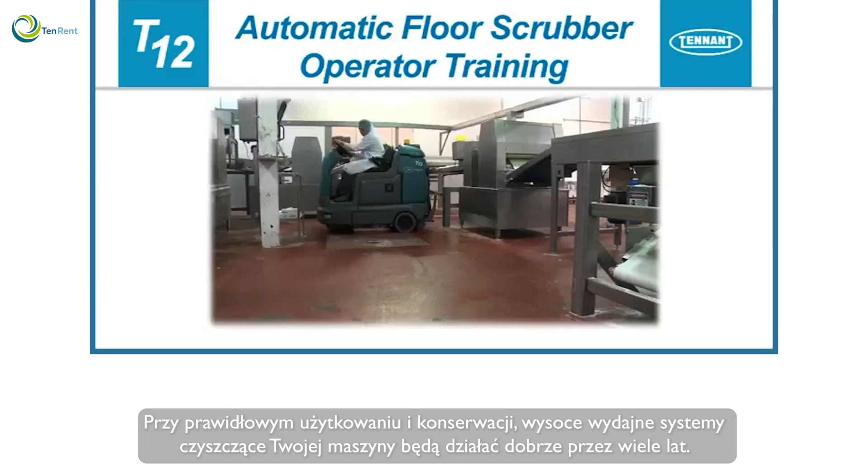Congratulations on the purchase of your new Tennant floor scrubber. With proper use and care, your machine's highly efficient cleaning systems will perform well for many years to come. This operator training video will help you better understand how to prepare your machine for use, scrub your floors, and care for your machine so you get the longest life and best performance from your floor scrubber.

Safety: it is the operator's responsibility to operate the machine safely. The safety labels that appear on the machine indicate important information you need to be aware of when operating the machine. The operator should read and fully understand the operator's manual prior to operating the machine.

How the scrubbing systems work. Your machine can effectively scrub dirty floors. The one-step scrub button makes it possible to immediately begin scrubbing with the activation of a single button. As the machine travels forward, the desired amount of cleaning solution is regulated and distributed to the floor. The brushes use the cleaning solution to scrub the floor clean. When traveling forward, the squeegee wipes the dirty solution from the floor, while the scrub vacuum fan draws the dirty solution collected by the squeegee off of the floor and into the recovery tank.

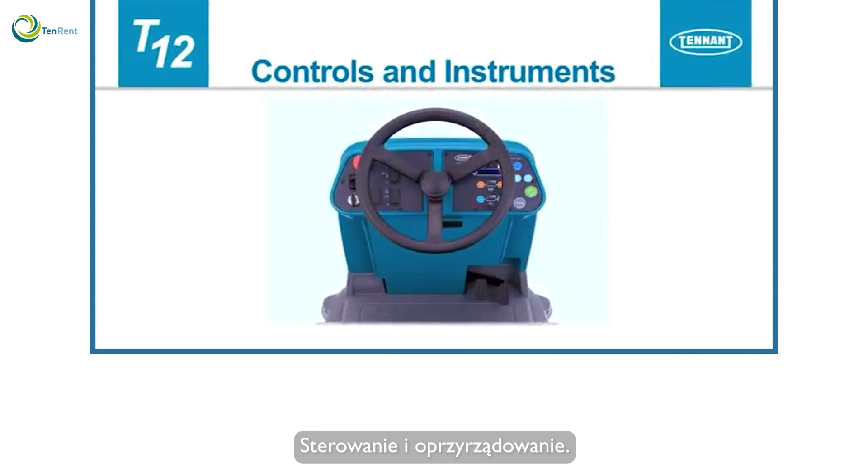T12 controls and instrumentation. The steering wheel controls the machine travel path. There is a control panel to the left of the steering wheel. An on-off key switch is used to control machine power. Turn the key to the right to turn the machine's power on, and to the left to turn it off.

The directional switch controls the forward or reverse direction of the machine. Place the switch in the forward position to propel forward, and the reverse position to propel in reverse.

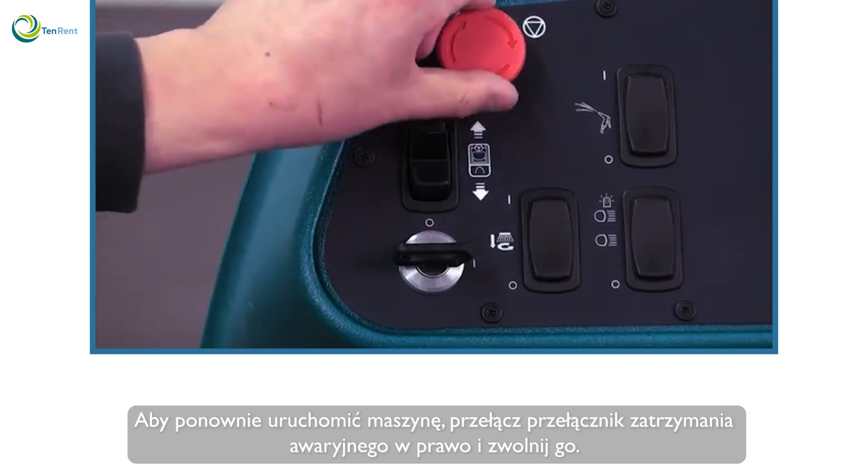The power kill switch stops all power to the machine. Press the switch to stop the machine power. To restart the machine, turn the power kill switch to the right and release it. Then cycle the key switch off and then on again. Note: the power kill switch should only be used in case of an emergency. It must not be used for normal stopping while the machine is moving, as this may damage the machine.

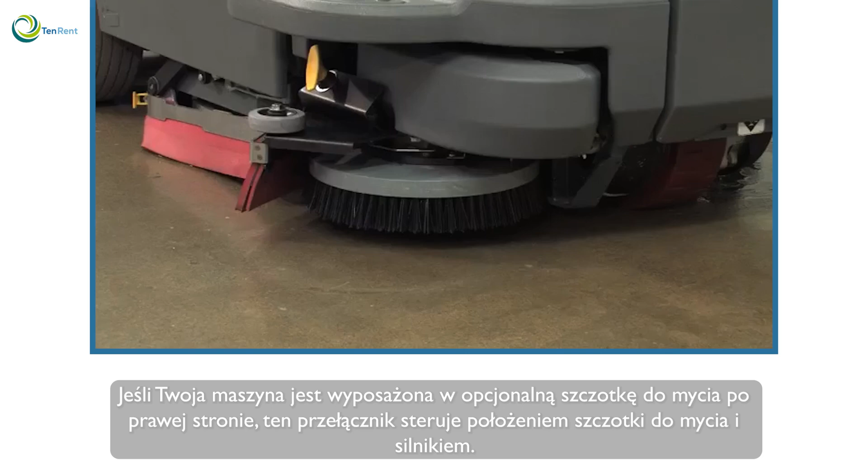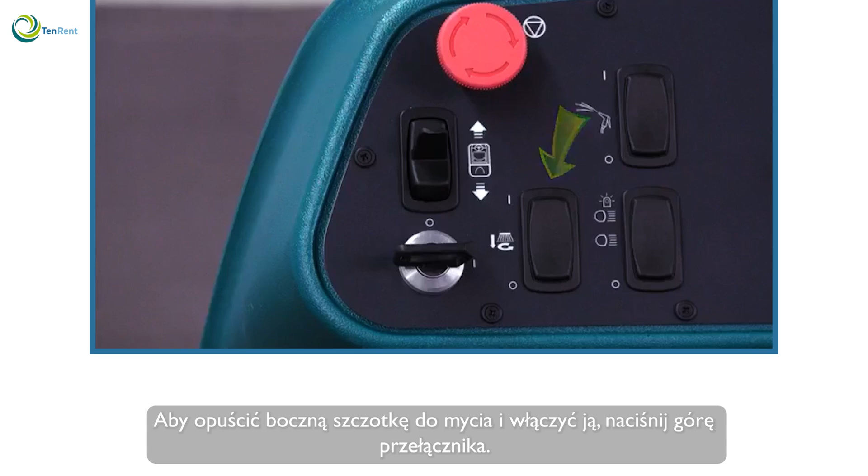If your machine is equipped with the optional right side scrub brush, this switch controls the position of the scrub brush and the motor. To lower the side scrub brush and turn it on, press the top of the switch. To raise the side scrub brush and turn it off, press the bottom of the switch.

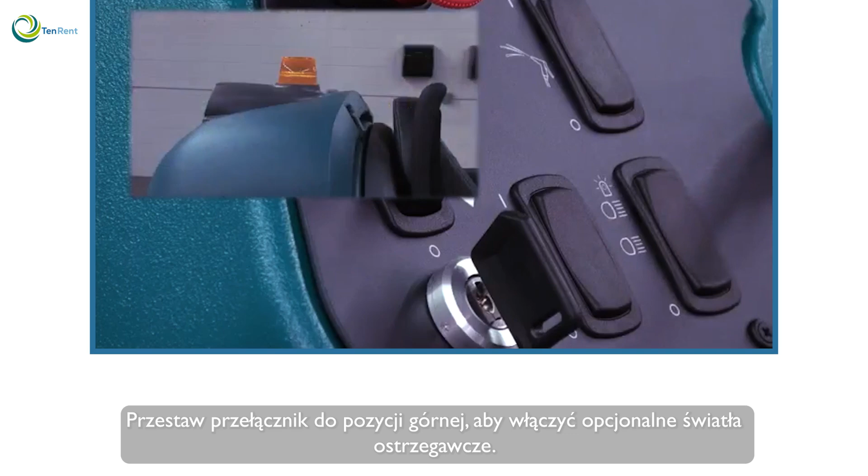The operating lights are controlled by the light switch. Place the switch in the middle position to turn on the operating lights. Press the top of the switch to turn on the operating lights and the optional safety lights. Press the bottom of the switch to turn off all lights.

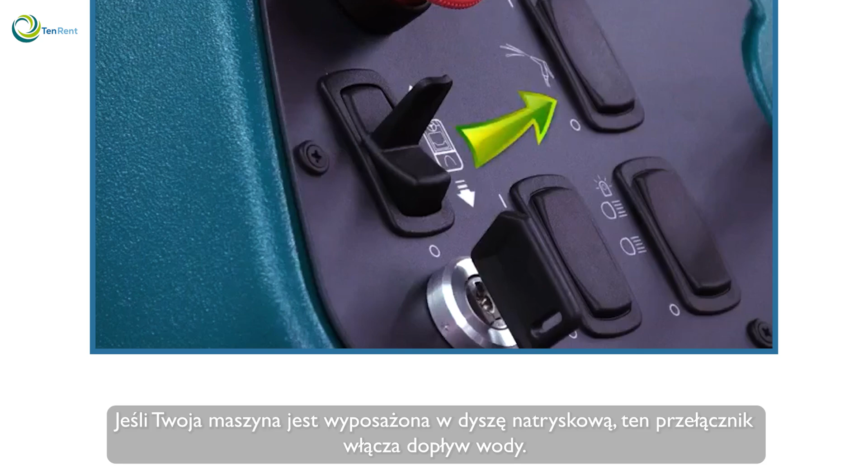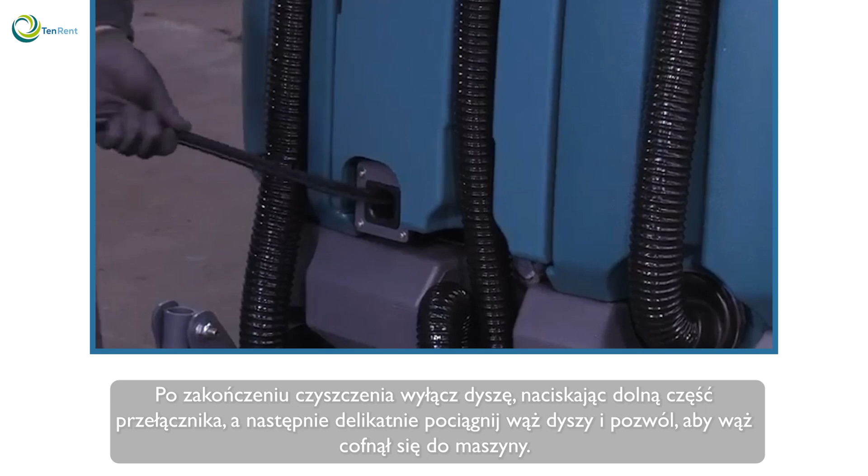If your machine is equipped with a spray nozzle, this switch turns on the water supply. To turn on the spray nozzle water supply, press the top of the switch. Next, pull the spray nozzle from the back of the machine and clean as required. When you are finished cleaning, turn off the spray nozzle by pressing the bottom of the switch, and then gently tug the spray nozzle hose and allow the hose to retract into the machine.

To the right of the steering wheel is a control panel. Most of the scrubbing functions are controlled by the operator using the controls on this panel. There is a display window near the top of this panel. Above the display window is a warning indicator. In certain conditions, the warning indicator will turn on and a message will be displayed in the window below the indicator. You may be required to stop the machine and follow your company's service procedure guidelines to correct the condition.

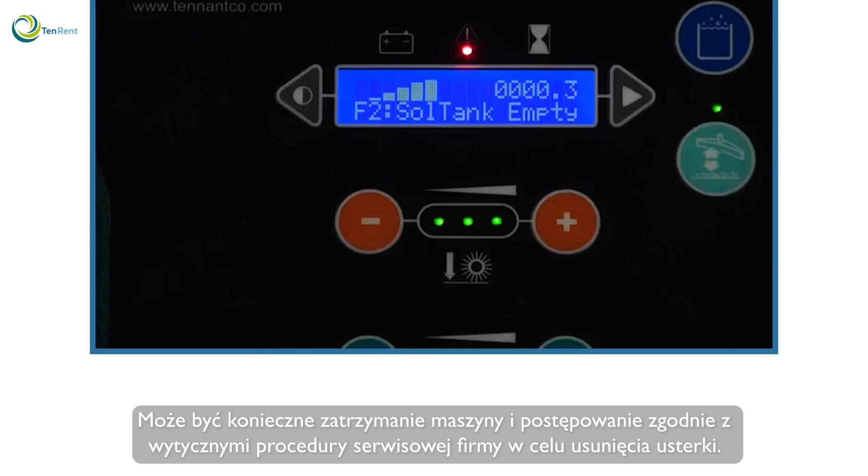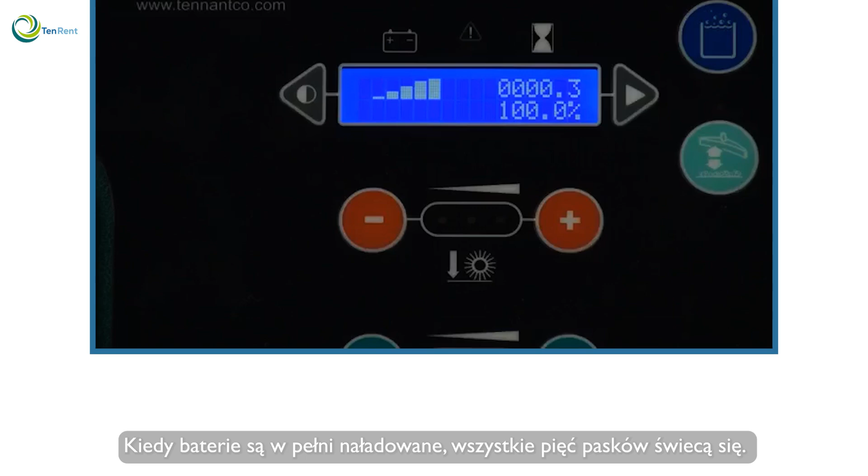This display window is also used to indicate the battery charge level, hour meter reading, the solution level, and the recovery tank level. The battery discharge indicator displays the charge level of the batteries while the machine is operating. When the batteries are fully charged, all 5 bars are lit. Recharge the batteries when there are no longer any bars showing in the display.

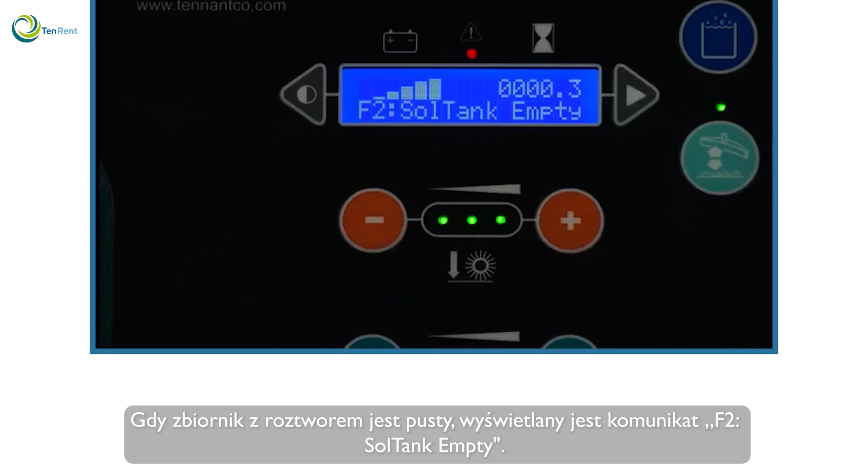The hour meter records the hours the machine has been operated. Use this information to determine machine service intervals. When the solution tank is empty, the message F2 Sol Tank Empty is displayed. Refill the solution tank when it is empty. When the recovery tank is full, the message F1 RCV Tank Full is displayed. Empty the recovery tank when it is full.

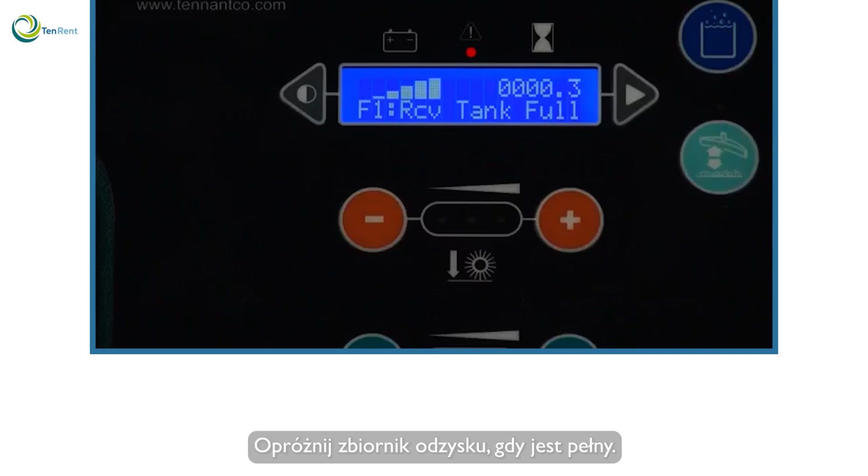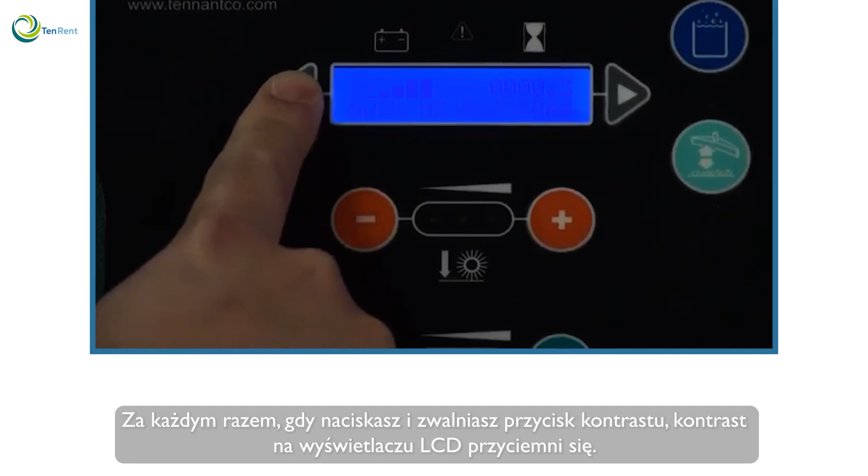The display contrast can be easily adjusted. Each time the contrast button is pressed and released, the contrast will darken in the LCD display. Once the display reaches the darkest setting, pressing and releasing the button again will increase the display to the brightest setting. The Supervisor Control button is used to access the configuration and diagnostic modes.

Only properly trained service personnel should access these modes.

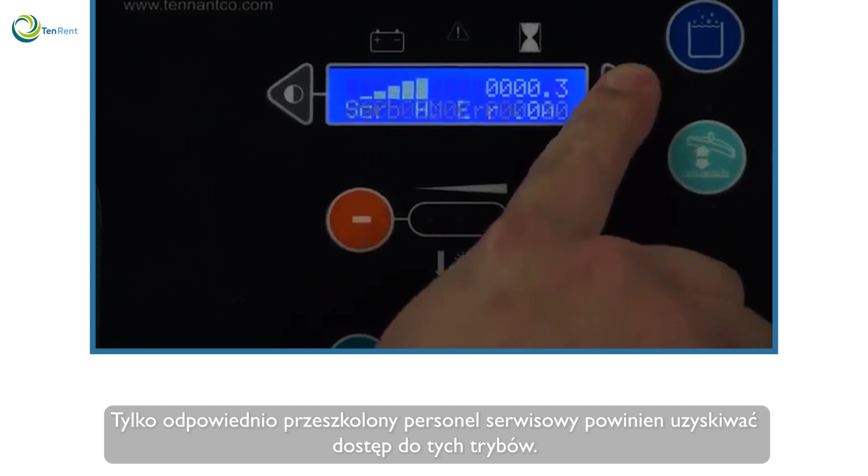The large green button is the one-step scrub button. Pressing this button turns on all scrubbing systems that were active the last time the machine was used. Note: there may be a short delay before all scrubbing systems are activated and the indicator light turns on. Pressing the button again turns off all scrubbing systems. When the one-step button is pressed to stop scrubbing, the machine remembers which scrub settings were active. When it's pressed again to start scrubbing, the machine returns to those settings.

To allow the cleaning solution to remain on the floor and improve your cleaning results, you can raise the rear squeegee and turn off the vacuum fan by pressing the squeegee and vacuum fan buttons. Pressing these buttons again will lower the squeegee to the working position and turn on the vacuum fan, so you can recover the solution.

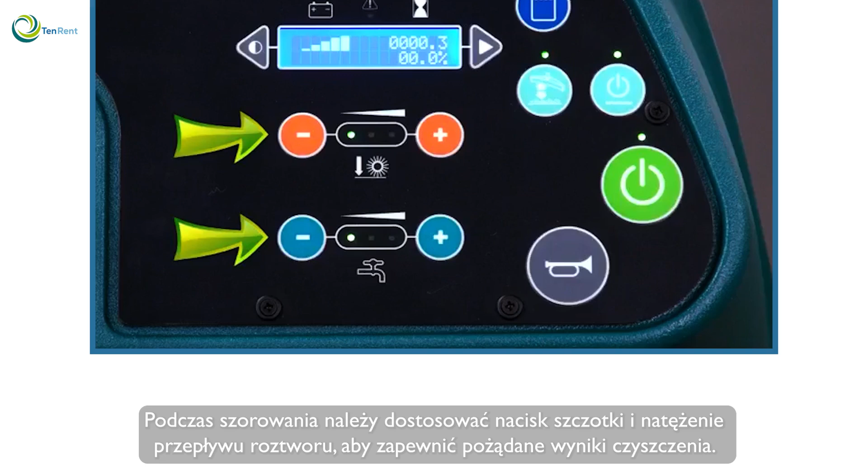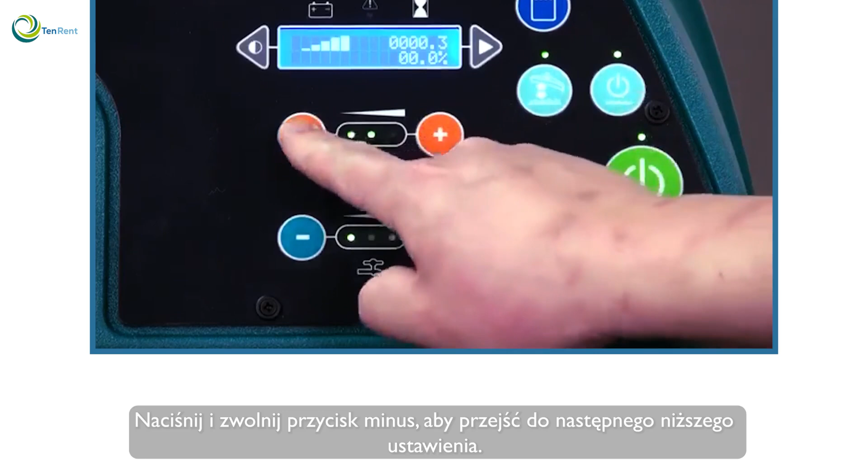While scrubbing, the brush pressure and the solution flow rate should be adjusted to provide the desired cleaning results. When the brush pressure LED on the left is lit, the brush pressure is at its lowest setting. To increase the brush pressure to the next higher setting, press and release the plus button. Press and release the minus button to move to the next lower setting.

The solution flow rate is adjusted with the solution decrease minus button and solution increase plus button. Under normal cleaning conditions, the brush pressure and solution flow rate should be set to the minimum settings required to clean the floor. Note: travel speed and floor conditions will also affect cleaning performance.

The Scrub Mode button controls the optional ec-H2O scrubbing solution system. With this button inactive, the machine operates in conventional mode. The ec-H2O technology will be explained in more detail later in this video.

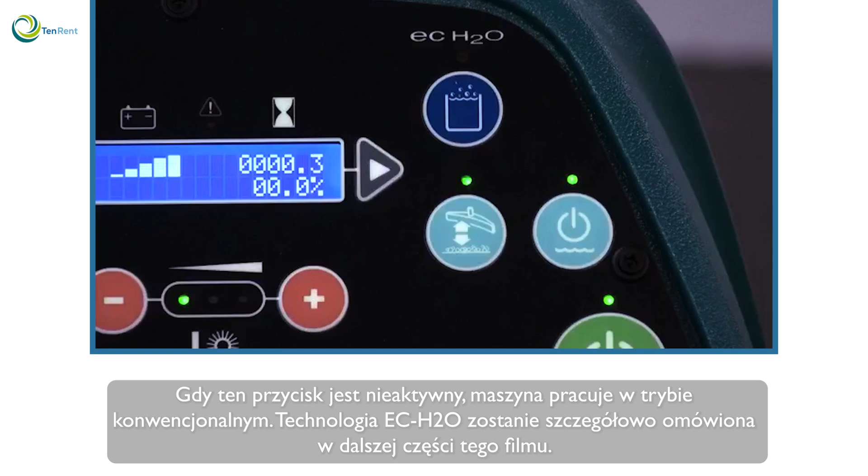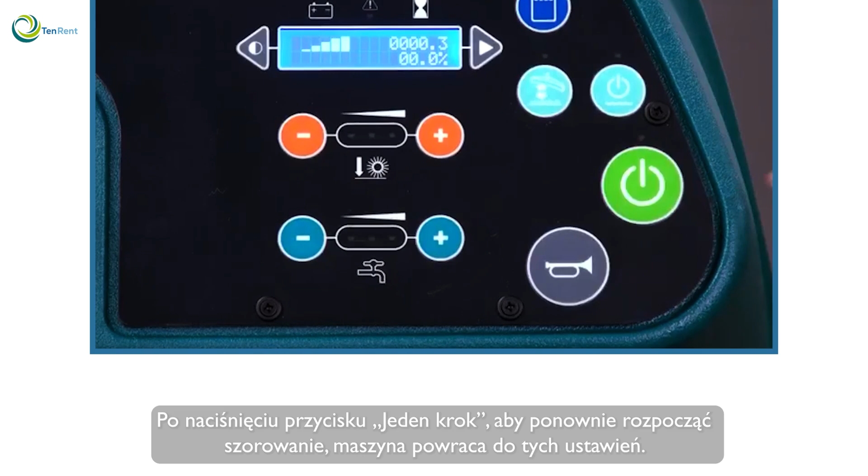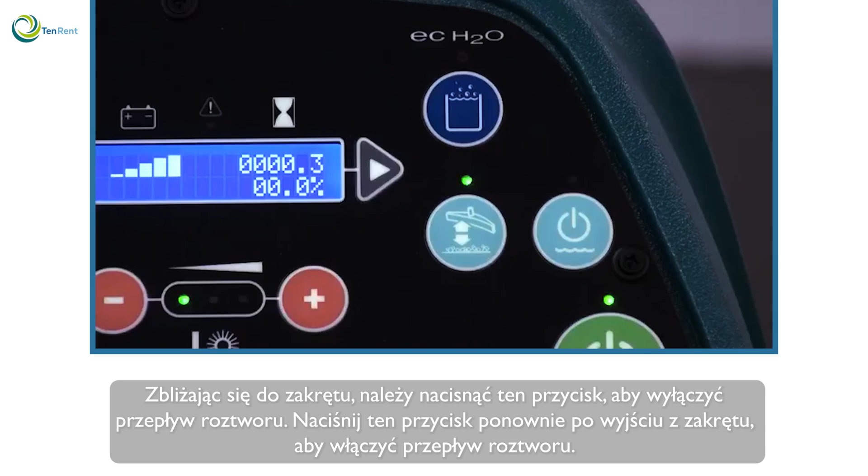When the one-step button is pressed to stop scrubbing, the machine remembers the active settings. When it's pressed again to start scrubbing, the machine returns to those settings. Above the one-step button is a solution on-off button. When approaching a turn, this button should be pressed to turn the solution flow off. Press the button again when exiting the turn to turn the solution flow on.

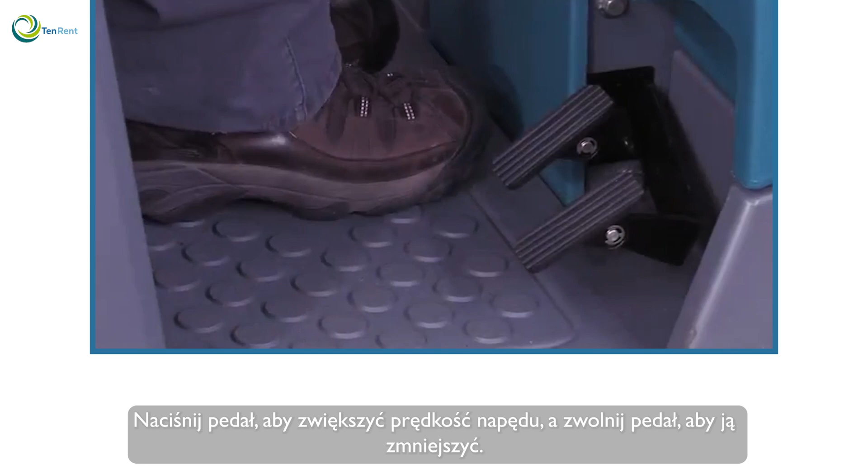The horn button is located in the bottom right corner. Pressing this button will sound the horn. The machine's propel speed is controlled by a foot pedal. Press down on the pedal to increase propel speed and release the pedal to decrease speed. The brake pedal slows and stops the machine. Depress the brake pedal to stop the machine. When the machine comes to a stop, the parking brake automatically turns on. When you press the propel pedal again, it releases.

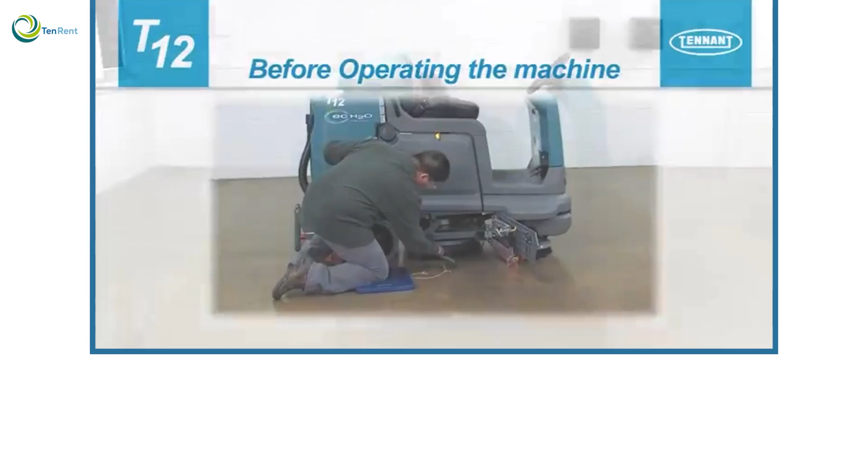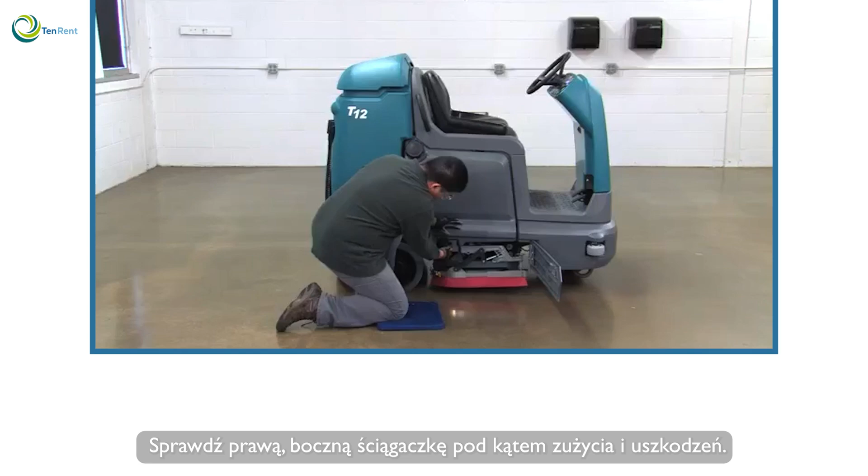Before operating the machine, there are checks that need to be completed to make sure your machine is ready to clean. Check the battery charge level. Check the operating lights. Check the right side squeegee for wear and damage. Check brushes for wear and damage. Remove any wire, string, or twine that may have become wrapped around the scrub brushes.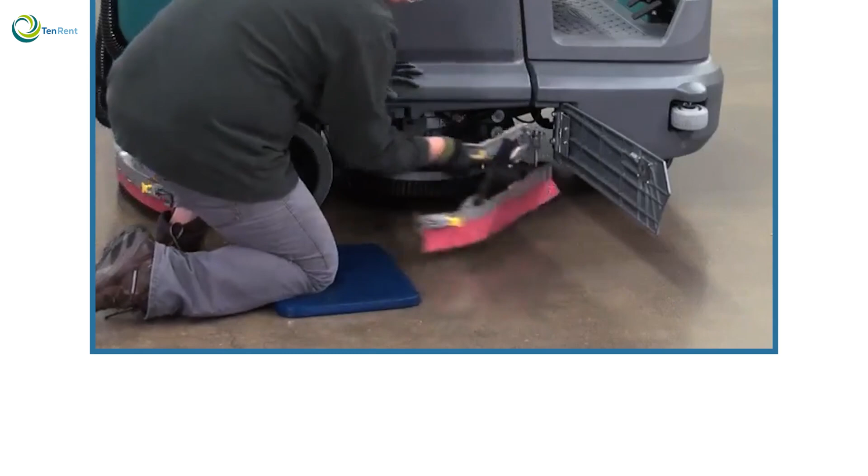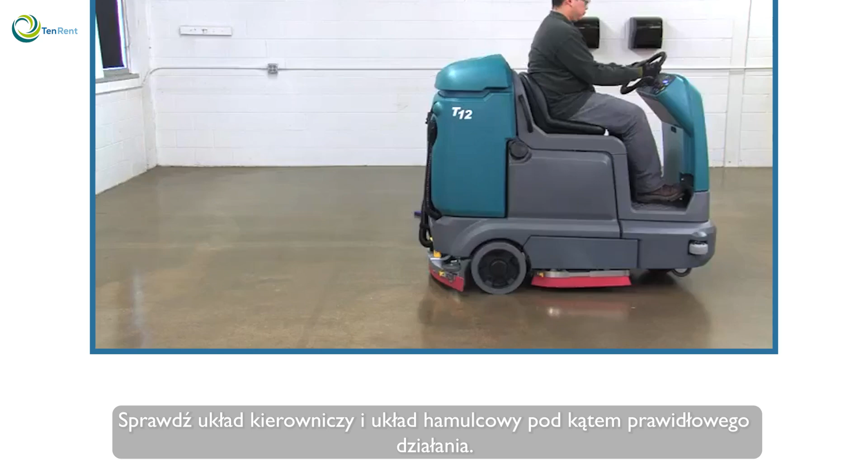Check the rear squeegees for wear and damage. Check the solution and recovery tank cover seals for wear or damage. Confirm that the vacuum fan inlet filter is clean. Then remove the debris tray, empty it, and wash it out. Check the left side squeegee for wear and damage. Check the steering and braking systems for proper operation. Check maintenance records to determine maintenance requirements.

If your machine is equipped with the ECH2O scrubbing technology, confirm all conventional cleaning agents are drained and rinsed from the solution tank. Confirm that the solution tank is filled with clear, cool water only.

Preparing your machine to scrub. Open the solution tank fill port. Partially fill the solution tank with water, not to exceed 60 degrees Celsius or 140 degrees Fahrenheit. Pour the required amount of detergent into the solution tank. Attention! Only use recommended cleaning detergents. Machine damage due to improper detergent usage will void the manufacturer's warranty.

Fill the solution tank with water. Warning! Flammable materials can cause an explosion or fire. Do not use flammable materials in the tanks. Next, turn the key switch on, press the large green one-step scrub button, and start scrubbing.

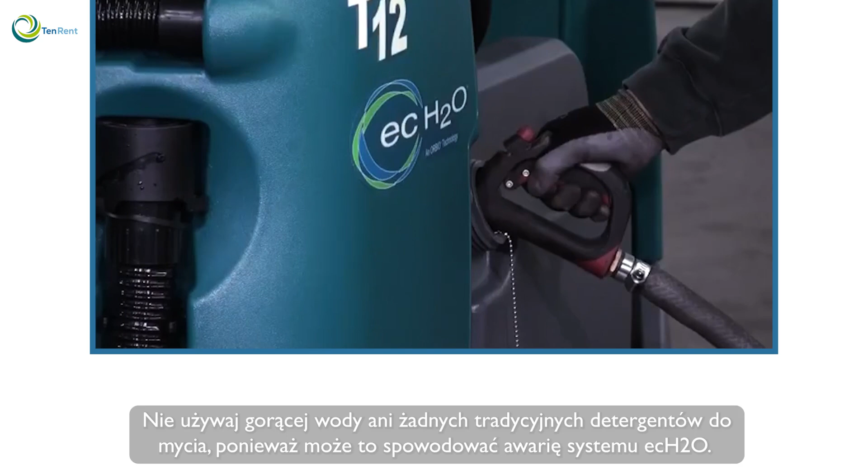Optional ECH2O technology. ECH2O is a technology that electrically converts plain tap water into a cleaner, without chemicals. If your machine is equipped with the ECH2O technology, you will see the ECH2O logo on the side of the machine. To use this technology, fill the solution tank with clean, cool water only. The water temperature should not exceed 21 degrees Celsius or 70 degrees Fahrenheit. Do not use hot water or add any conventional floor cleaning detergents, or an ECH2O system failure may result.

Next, turn on the key switch. Then press the ECH2O switch to enable the technology.

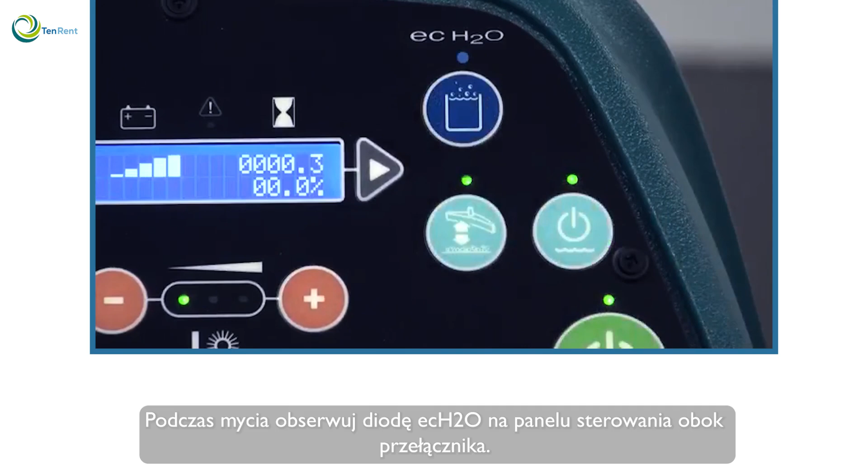While scrubbing, observe the ECH2O light on the control panel next to the switch. A solid blue light means the ECH2O technology is functioning properly. If the light is flashing red or solid red, a fault message will appear in the display window. Refer to the operator's manual for more information and follow your company's service procedure guidelines.

Main brush information. The amount and type of soilage play an important role in determining the type of brushes to use on your machine. For best results, use the correct brush or pad type for your cleaning application. Brush and pad application guidance is located in the operator's manual, and part numbers are located in the parts manual. When the brushes need replacing, always replace them in sets.

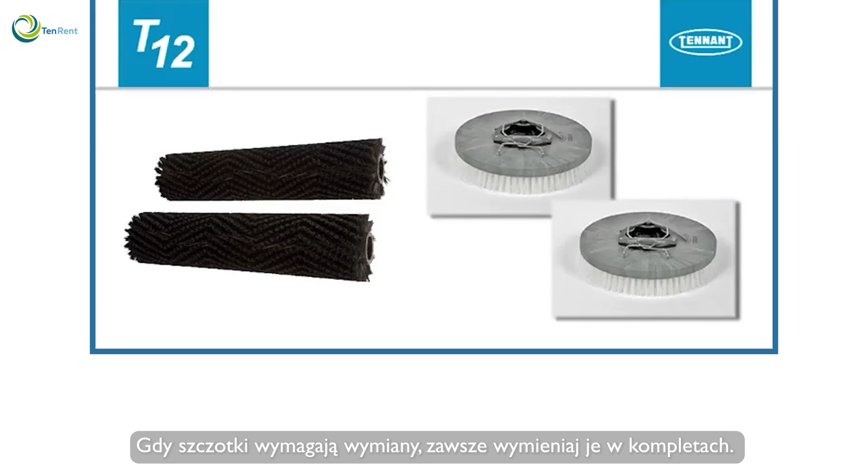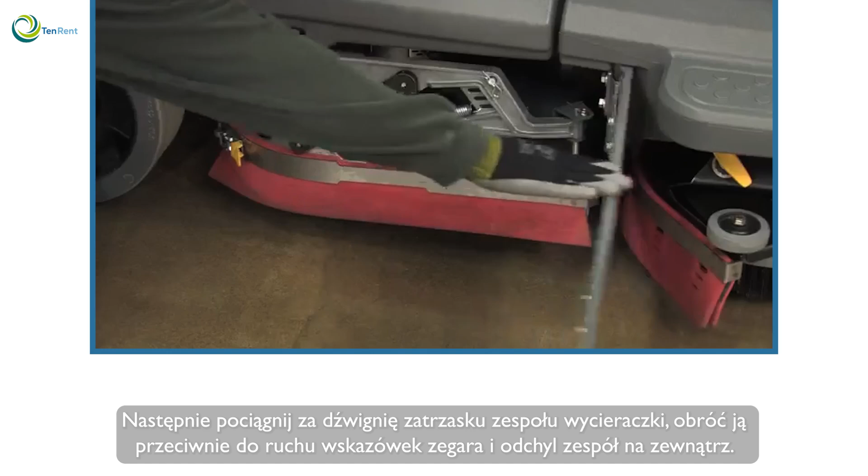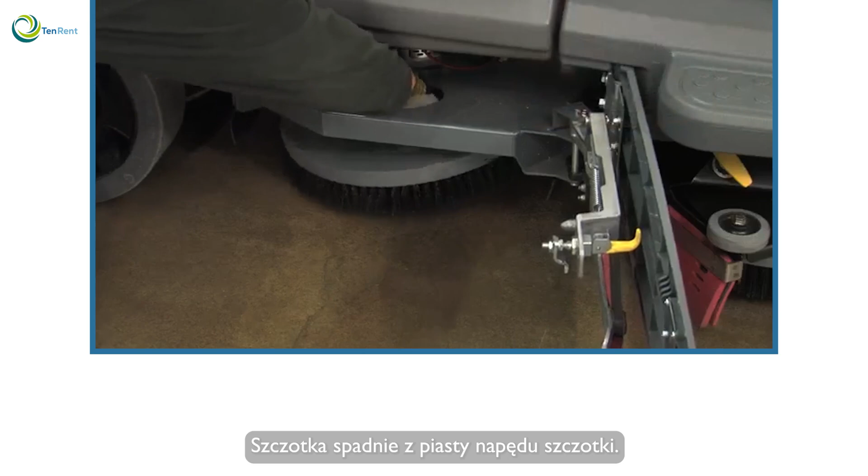With the machine stopped on a level surface, turn off the machine. Open the brush compartment door. Next, pull out on the squeegee mount assembly latch lever, turn it counterclockwise, and swing the assembly outward. Turn the brush until you can see the brush spring clip. Press the spring clip together with your thumb and index finger, and the brush will drop off the brush drive hub.

When using pads, attach the pad to the pad driver and secure the pad with the center lock before installing the pad driver on the machine.

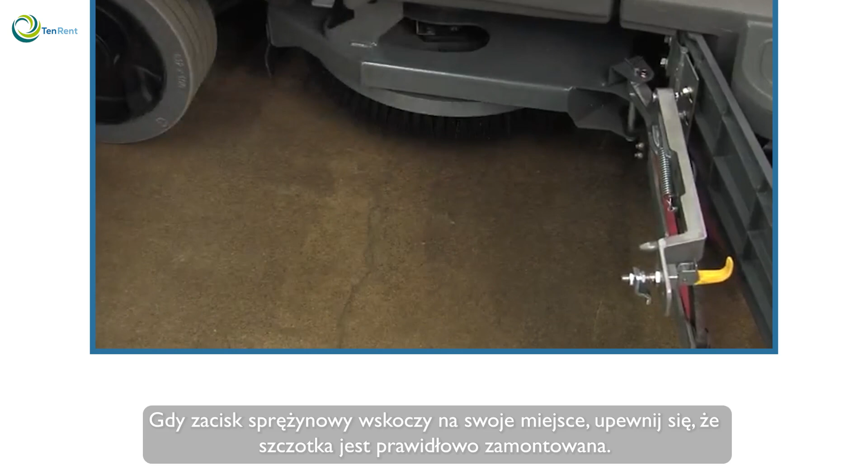To install the pad driver or brush on your machine, align it with the motor hub and hook the spring clip on one of the hub points. Next, press down on the brush and it will snap into place on the brush hub. When the spring clip snaps into place, confirm that the brush is securely installed. Next, close the squeegee assembly and secure the latch lever, then close the brush compartment door.

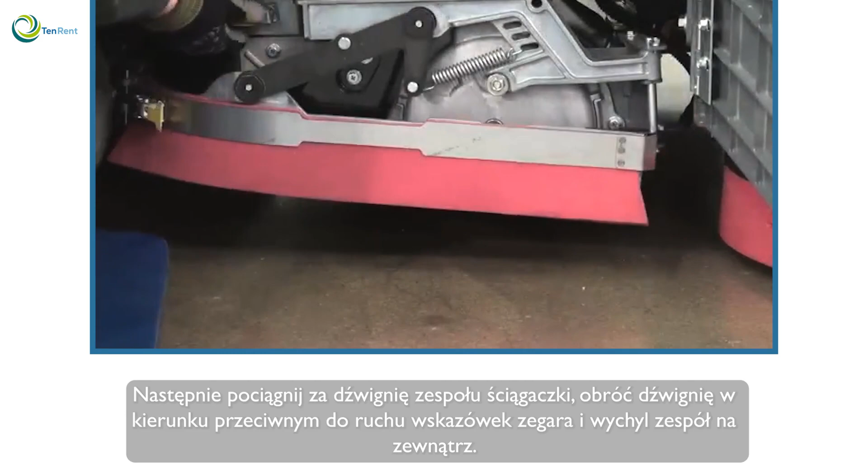Changing cylindrical brushes. With the machine stopped on a level surface, turn off the machine. Open the brush compartment door. Next, pull out on the squeegee mount assembly lever, turn the lever counterclockwise, and swing the squeegee assembly outward. Remove the idler plate from the scrub head. Remove the brush from the scrub head by pulling outward on the brush.

Slide the brush onto the drive plug on the scrub head and secure the idler plate. Close the squeegee assembly and secure the latch lever. Close the brush compartment door. Follow the same procedure on the other side of the machine to replace the other scrub brush.

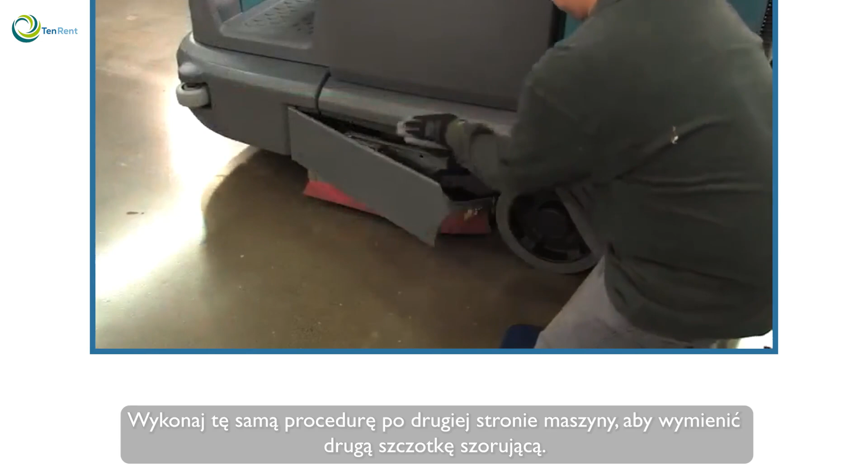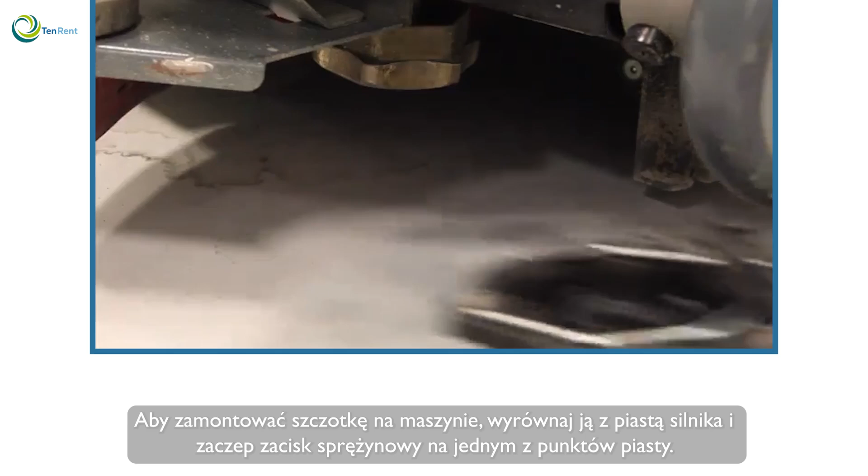Changing the side brush. The optional side brush provides a wider scrubbing path and allows you to clean next to walls and racks. With the machine stopped on a level surface, turn off the machine. Next, manually spin the brush until the spring handles are visible, then squeeze the spring handles to release the brush. To install the brush, align it with the motor hub and hook the spring clip on one of the hub points. Next, press down on the brush and it will snap into place on the brush hub. When the spring clip snaps into place, confirm the brush is securely installed.

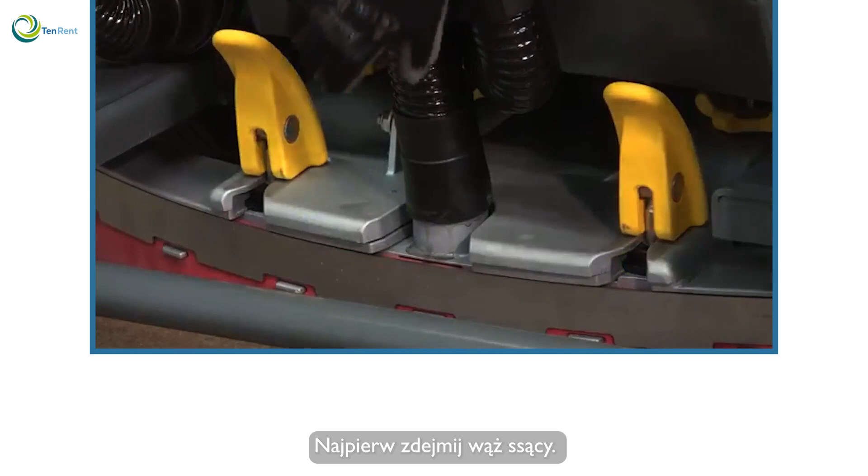Rotating or changing the rear squeegees. When the blades become worn, simply rotate them end for end, or top to bottom, to use a new wiping edge. Replace the squeegee blades when all the edges are worn. First, remove the vacuum hose. If your machine has the rear squeegee guard, lock it into the up position.

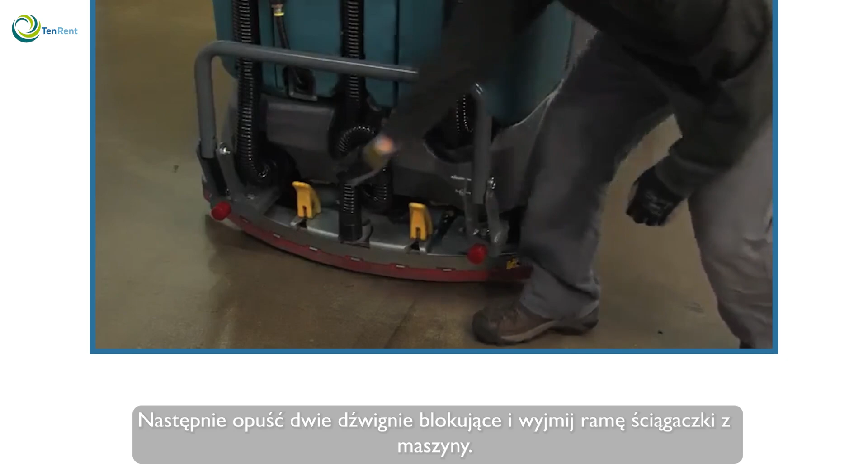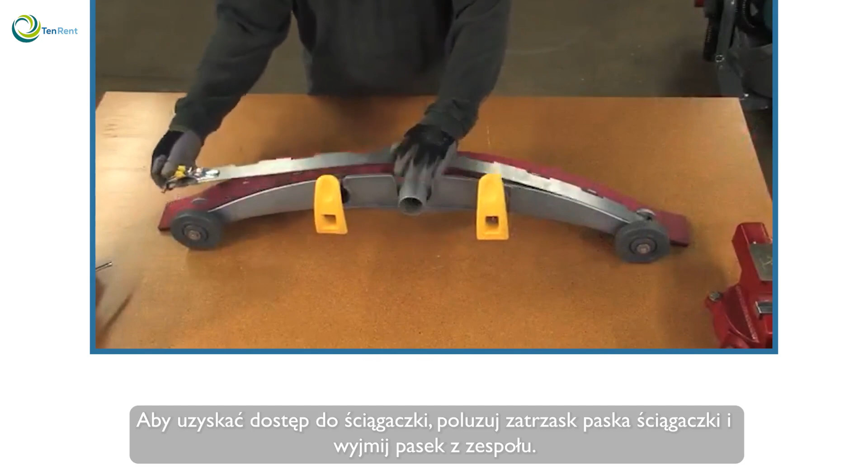Next, lower the two retainer levers and pull the squeegee frame from the machine. To access the squeegees, loosen the squeegee band latch and remove the band from the assembly. While holding the rubber grommets away from the frame, slide the inside squeegee frame away from the outer frame.

Install the new front squeegee blade, or rotate the existing blade to a new edge. Reinstall the inner squeegee frame on the outer frame. Install the rotated or new rear squeegee, and then install and secure the squeegee band.

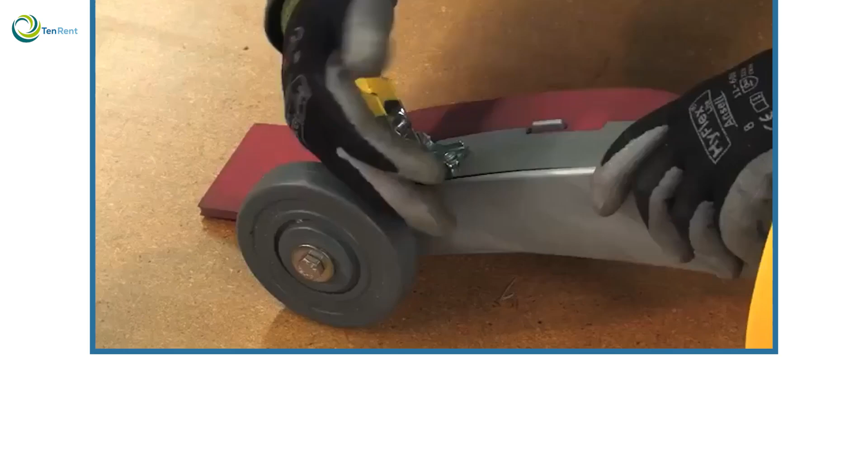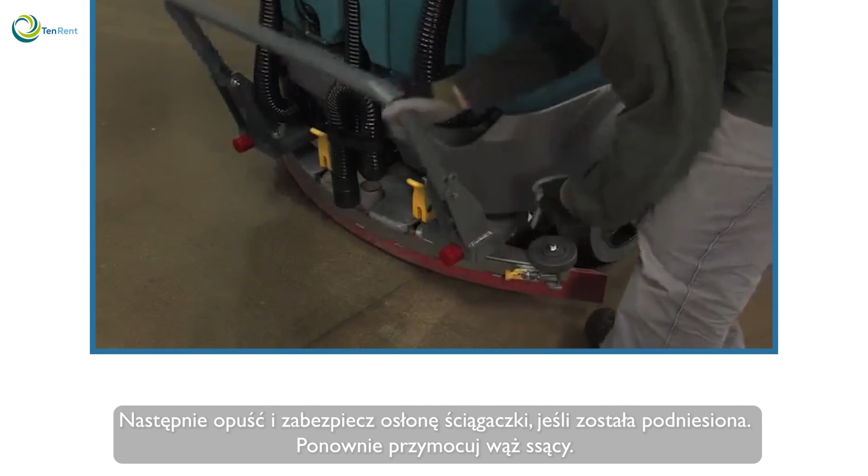Next, install the squeegee frame on the machine. Lower and secure the squeegee guard if it was raised. Reattach the vacuum hose.

Changing the side squeegees. With the machine stopped on a level surface, turn the machine off. Unlatch the side squeegee retaining band and remove it from the side squeegee assembly. Pull the old squeegee from the squeegee frame assembly and rotate it to an unworn edge.

Reinstall the side squeegee retaining band by hooking the front of the band on the front of the side squeegee frame. Then place it on the side squeegee and secure the retaining latch.

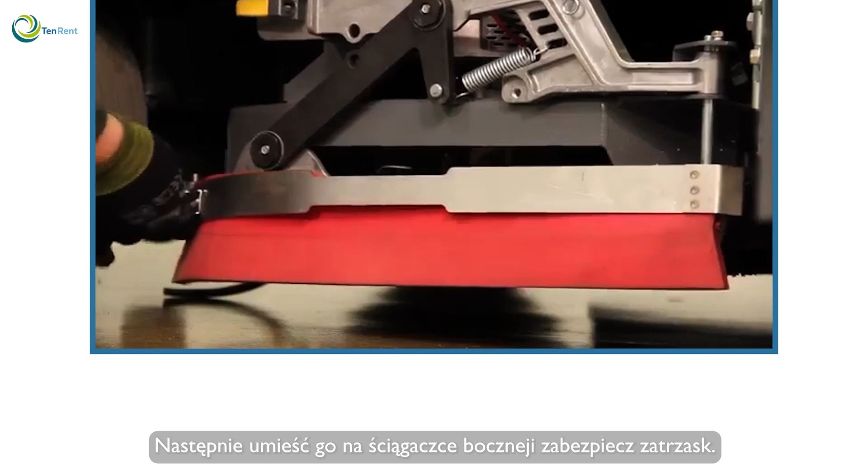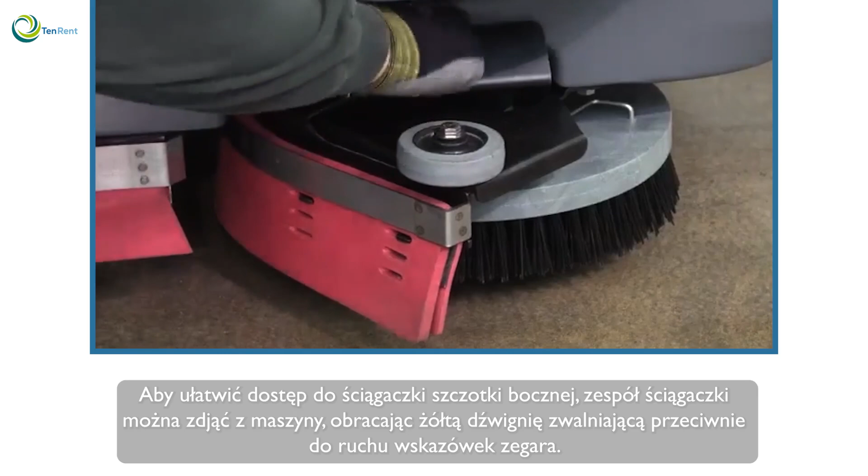Changing the side brush squeegee. For better access to the side brush squeegee, the squeegee assembly can be removed from the machine by turning the yellow release handle counterclockwise.

After it is removed from the machine, release the squeegee band latch and remove the band from the assembly. Then the outer squeegee and backup strip can be removed.

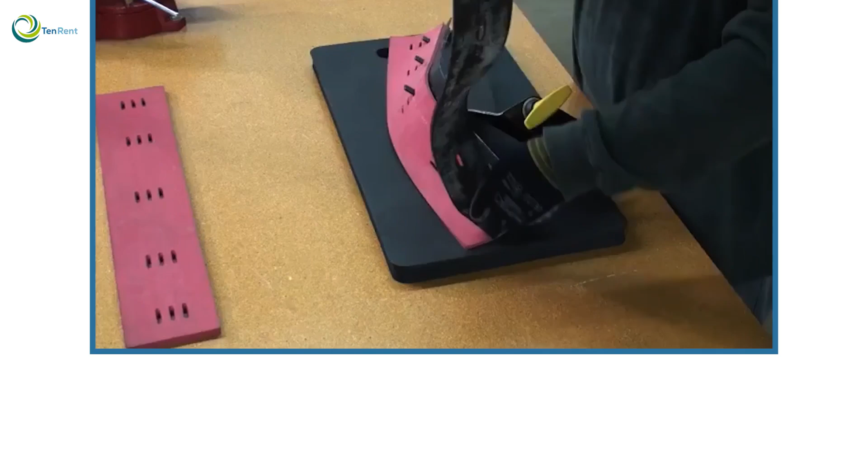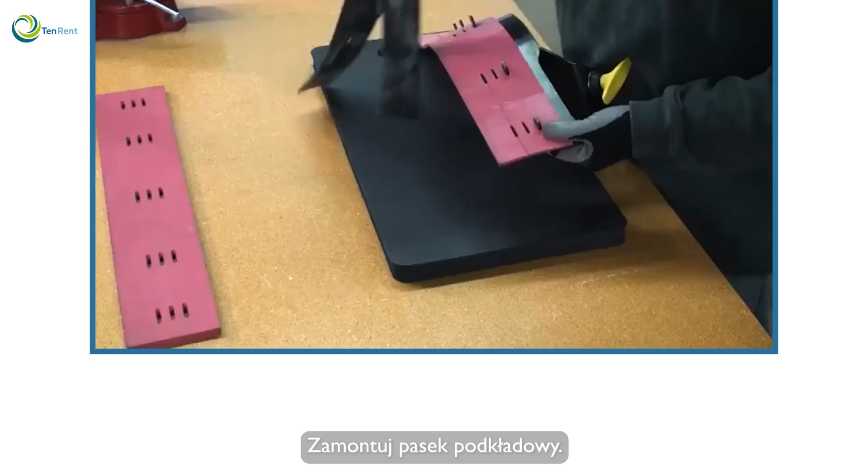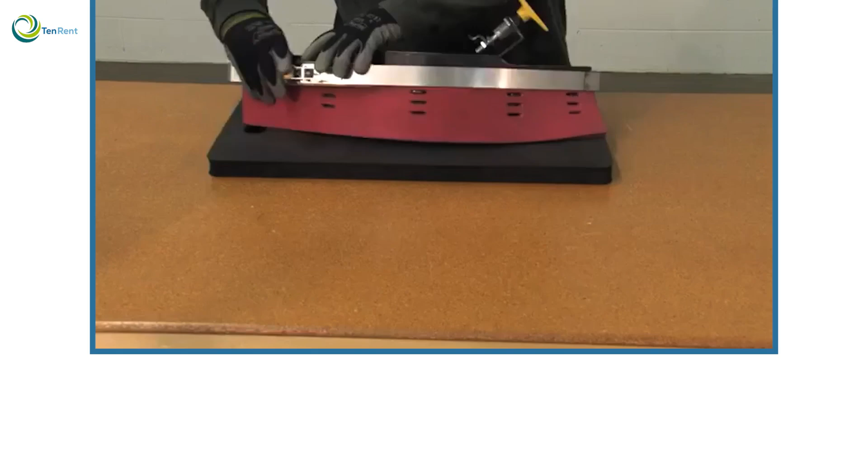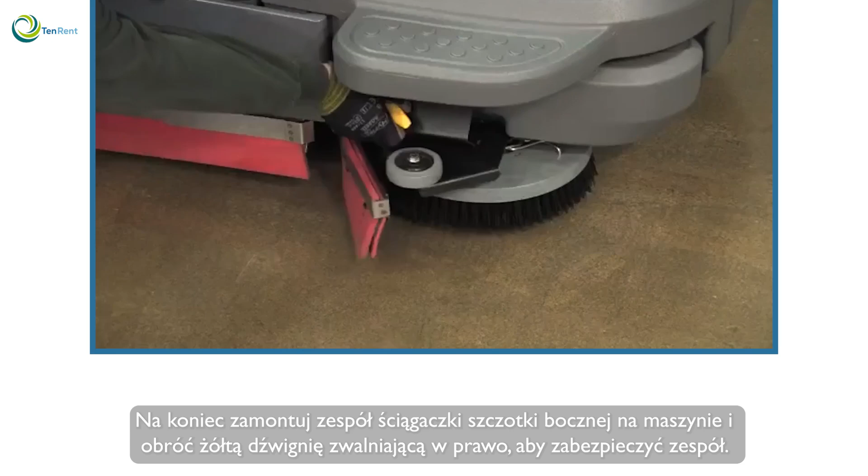Rotate or replace the inner squeegee. Install the backup strip and rotate or replace the outer squeegee. Next, reinstall the band and secure the latch. Finally, install the side brush squeegee assembly onto the machine and turn the yellow handle clockwise to secure the assembly.

Cleaning with your machine. Before scrubbing with your machine, manually pick up oversized debris, wire, string, twine, or any other debris that could become wrapped around or tangled in the brushes.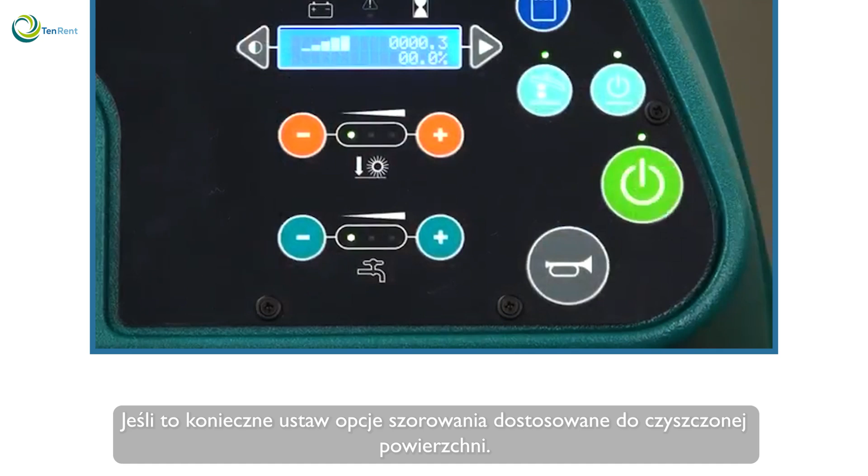Press the one-step scrub button to start scrubbing. If necessary, set the scrub mode and settings for the area being cleaned. Press the propel pedal to begin scrubbing. For safety, drive slowly on inclines and slippery surfaces.

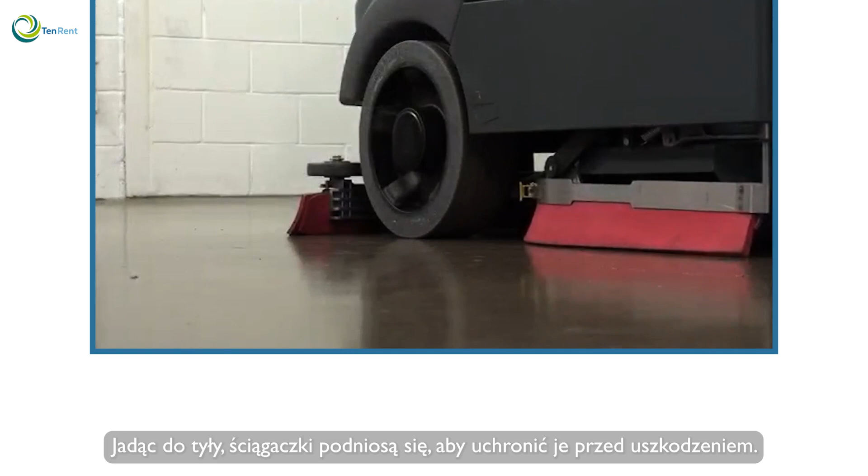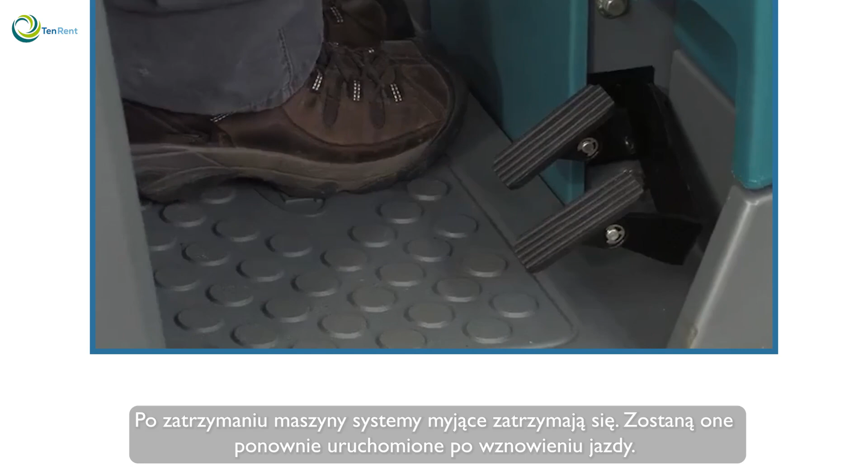When operating in reverse, the rear squeegee will raise to prevent damaging the squeegee. When traveling forward again, all scrubbing systems will turn back on. To stop the machine, release the propel pedal and press the brake pedal. As the machine stops, the scrubbing systems will stop. They will begin again when you resume propelling.

To stop scrubbing, press the one-step scrub button. The light next to the one-step scrub button will go off and all scrubbing functions will stop after a short delay.

Emptying and cleaning the machine. When your cleaning is finished, the machine needs to be emptied and cleaned. For safety, before leaving or servicing the machine, stop on a level surface and turn the machine off.

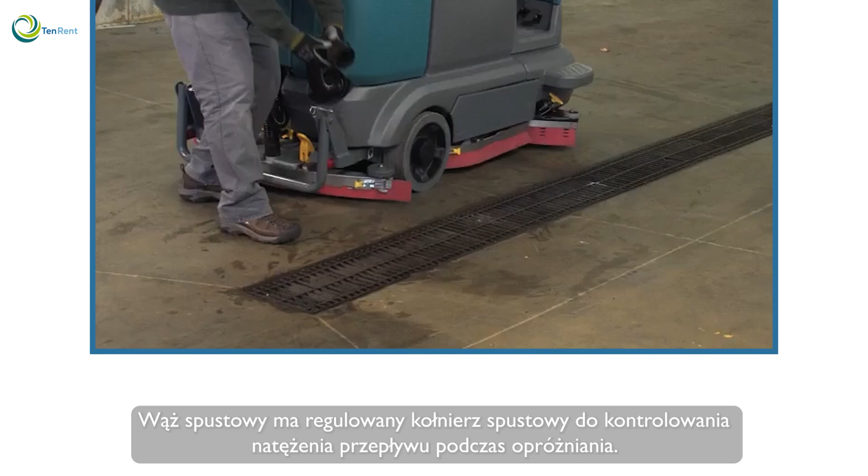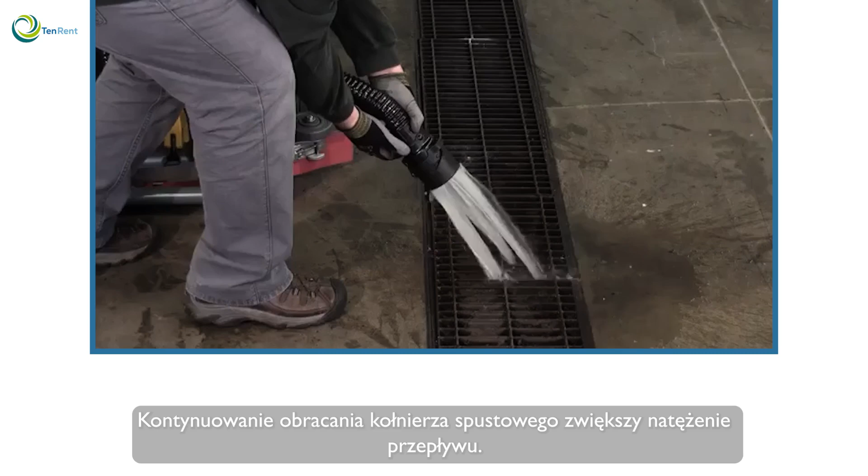Place the recovery tank drain hose next to a floor drain. The drain hose has an adjustable flow drain cuff to manage the flow rate during draining. By slowly turning the drain cuff to the first notch, the flow rate is controlled to reduce splashing. Continuing to rotate the drain cuff will increase the flow rate. Removing the cuff will allow full flow.

Lift the recovery tank cover and secure the cover brace. Then remove the debris tray, empty it, and wash it out. Next, use water to clean the recovery tank. Do not use steam to clean the tanks because excessive heat can damage the tanks and other components.

Warning: flammable materials can cause an explosion or fire. Do not use flammable materials in the tanks.

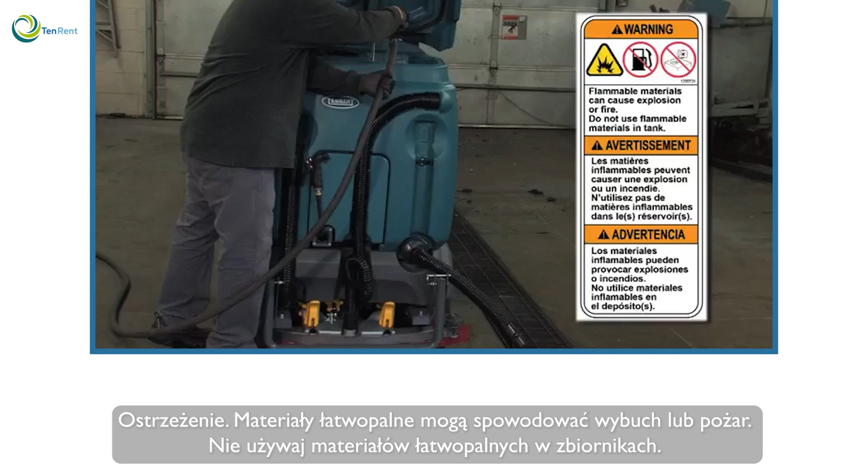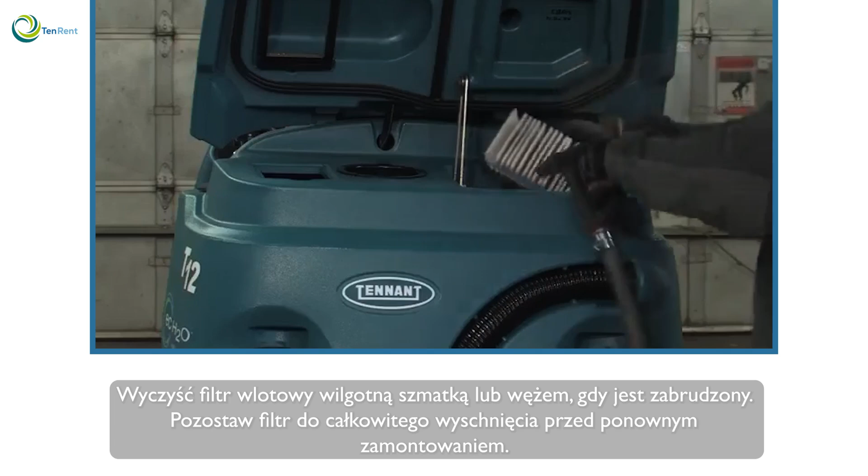Check the vacuum fan inlet filter daily. Clean the inlet filter with a damp cloth or hose when it is dirty. Allow the filter to dry completely before reinstalling it. If your machine has a cylindrical scrub head, remove and clean the debris tray.

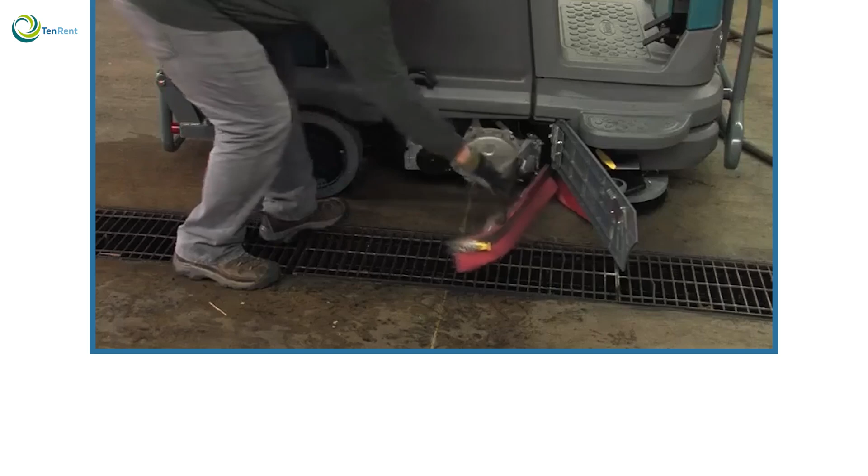Charging the batteries. To prolong the life of the batteries, recharge them only if the machine was used for a total of 30 minutes or more. Do not leave batteries discharged for lengthy periods.

To charge the batteries, first transport the machine to a well-ventilated area. Park the machine on a flat, dry surface. Turn the key off. Raise the seat and secure the latch during charging to allow any gases created by the charging process to escape from the battery compartment.

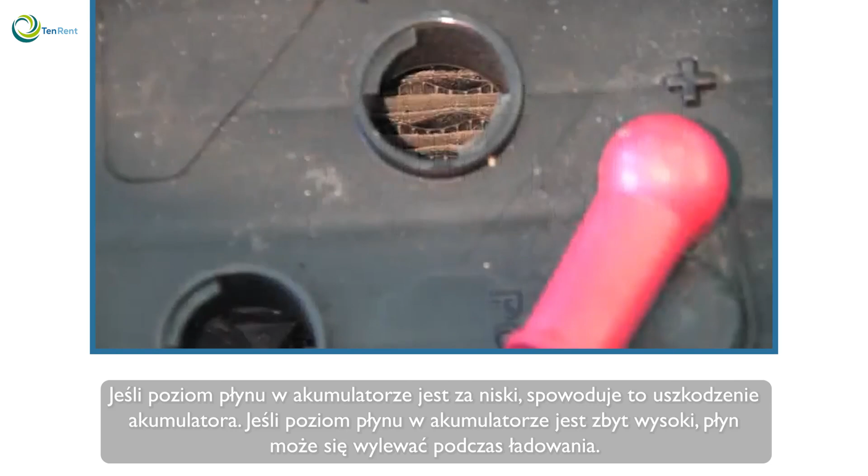If you are charging wet batteries, lead-acid batteries, the fluid level should be checked before charging the batteries. The fluid should be at the level shown. If the battery fluid level is too low, damage to the battery will result. If the battery fluid level is too high, the fluid may overflow while charging.

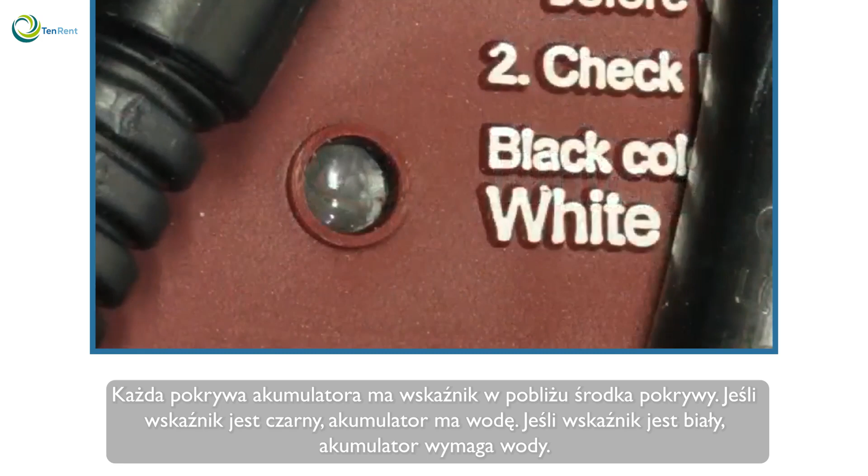If your machine is equipped with a HydroLink battery watering system, you will need to check if the batteries need water. Each battery cover has an indicator near the center of the cover. If the indicator is black, the battery has water. If the indicator is white, the battery needs water.

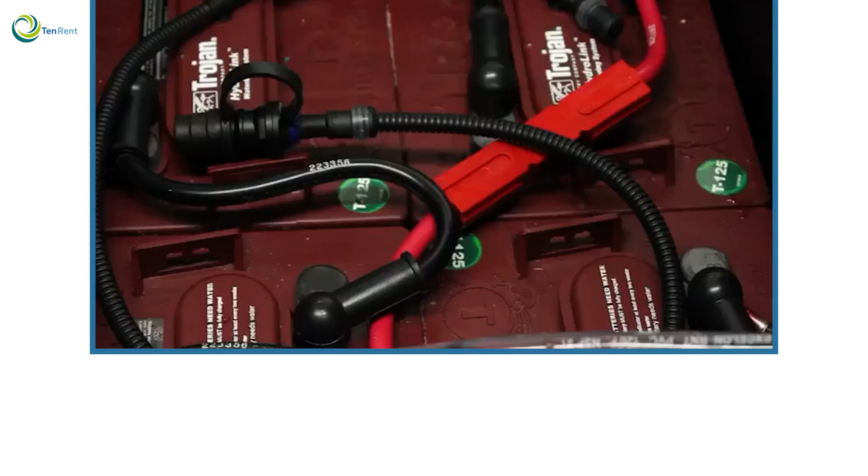There are only a few steps to using the HydroLink battery watering system. After the batteries have been fully charged, place the suction hose into a water supply container. Prime the ball pump until water comes out of the coupler. Remove the dust cap from the battery coupler.

Connect the pump coupler to the battery coupler. Squeeze the ball pump firmly until it becomes hard. This indicates that all of the cells are filled to the proper level. Disconnect the pump coupler from the battery coupler and place the dust cap on the coupler.

Warning: fire or explosion hazard. Batteries emit hydrogen gas. Keep sparks and open flame away.

If your machine is equipped with either the onboard or offboard charger, the next step is to plug the charger's AC power cord into a properly grounded receptacle. The supplied charger will automatically begin charging and shut off when fully charged.

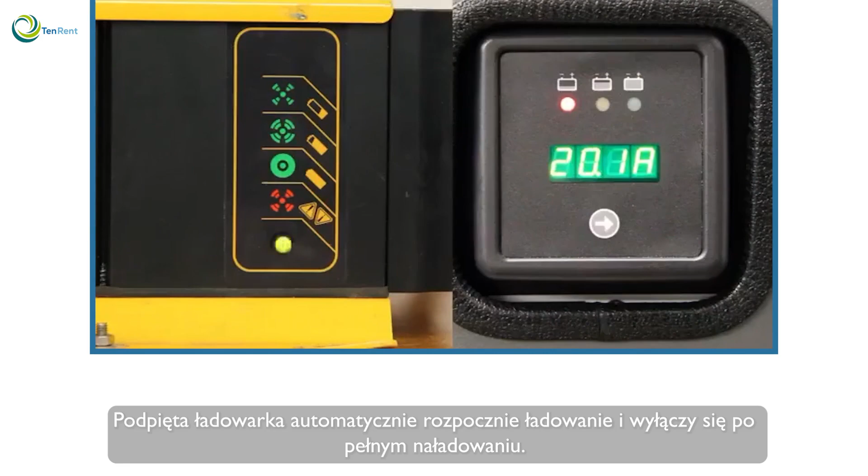Attention! Do not disconnect the charger's DC cord from the machine's receptacle when the charger is operating, because arcing may result. If the charger must be interrupted during charging, disconnect the AC power cord first.

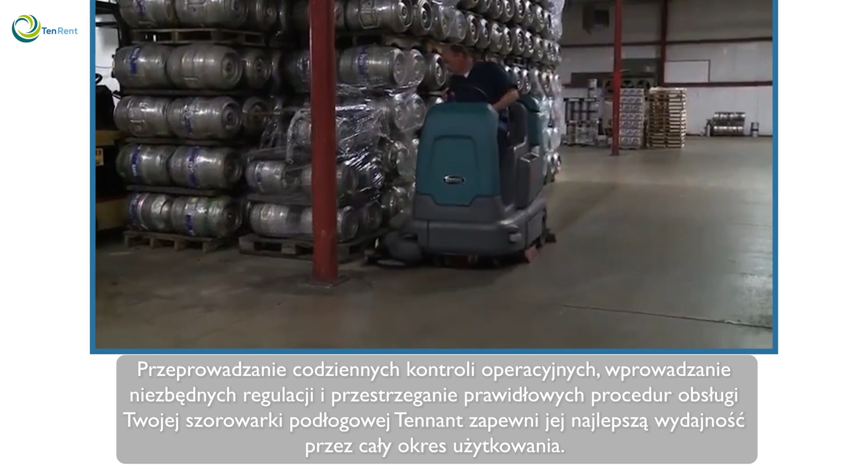Performing the daily operational checks, making needed adjustments, and following the proper operating procedures for your Tennant floor scrubber will ensure that it will perform in top condition throughout its useful lifetime. You will find it cleans better, has fewer maintenance issues, and effectively enhances the environment.